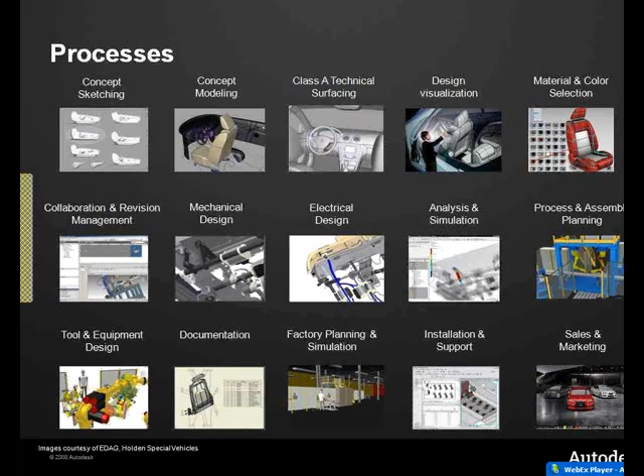So today, I want to first cover Autodesk. Many of you are probably familiar with the Alias product line, but Autodesk as a whole is very versed in all the software applications they offer. You probably know Autodesk Maya, 3ds Max, AutoCAD, Alias, Inventor, and probably Showcase as well. But we also have applications with a very wide range in the automotive industry. Here you can see pretty much all the processes and applications specific to automotive. Today we're going to look at concept sketching and modeling. Later on in the webinar series we'll look at Class A surfacing and visualization. But you can also see we have a full range of mechanical design applications, electrical, all the way down to the factory floor, including machine design, tooling, installation, buildings, you name it, we've got it covered.

We're all here to take a look at the Autodesk Alias family of products. Here you can see Alias Automotive, Alias Surface, Alias Design, and a brand new product, Alias Sketch. This new product, Alias Sketch, is a very unique painting application. It includes both paint workflows and vector workflows that use the exact same paradigm, so you can switch between them without changing your mindset. Perfect for hand sketching or technical illustration.

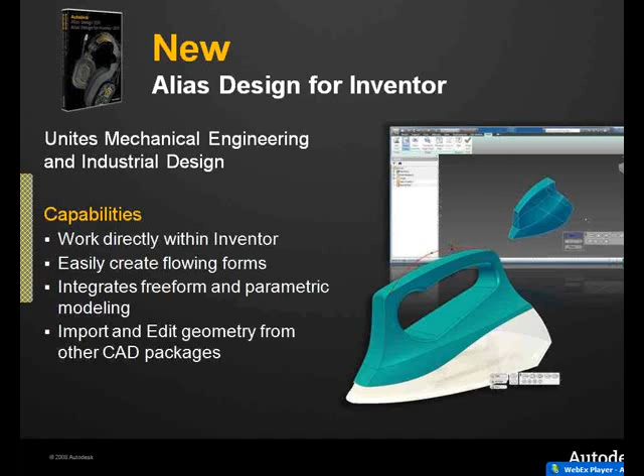Another new product we've introduced this year is Alias Design for Inventor. This is included with Alias Design. It's an add-in for Inventor that adds concept development workflows and really unites the mechanical engineering and industrial design workflows. Very exciting.

For this webinar, we'll be looking at the early process of developing a car, mainly the painting and concept modeling workflow. Next, we'll have the technical surfacing webinar, as well as the visualization webinar. So let's get started.

Here you can see Alias Automotive. Now, I'm using Automotive just because it has all of the features available in the Alias product line. This is what students would use, and almost all of our automotive customers as well. Let's first start out by taking a look at some sketching processes, paint workflows within Alias, and then take that through to some concept modeling and so on.

Go ahead, we're going to take a look at an example, a non-automotive example, just to start off with. Accept all those options. While I have this up, let's go ahead and take a look at what Alias has to offer.

Alias, if you're not familiar with it, is a complete design package. It includes painting, surfacing, Class A modeling, and all mesh tools as well. You can see that this head is actually a polygon head, along with visualization.

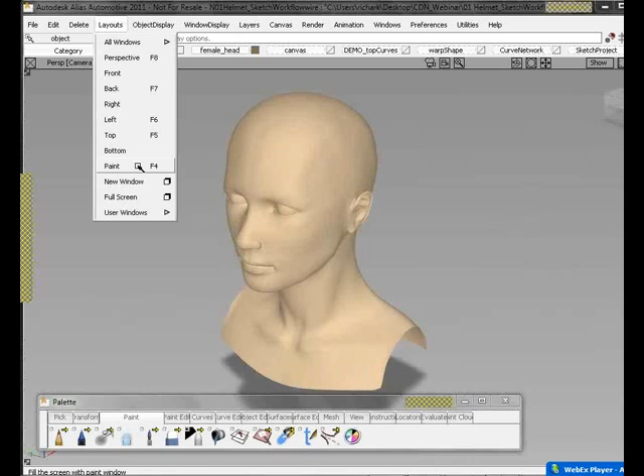Okay, let's take a look at the paint workflow. Inside of Alias, under the layout, there's a paint layout tool, and this brings us into more of a 2D layout window that you would find in other painting packages.

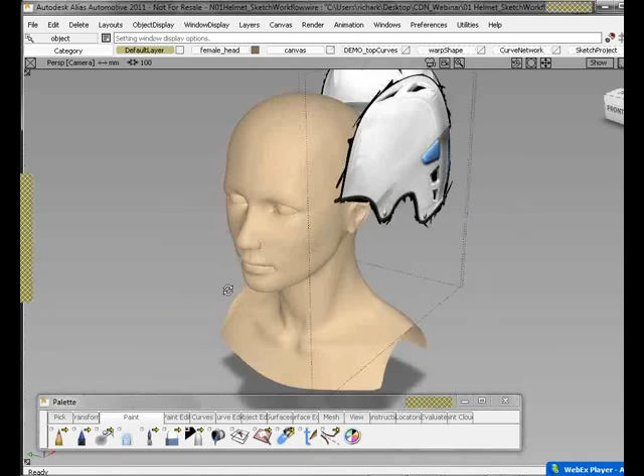Let's take a look at some finished drawings here. I've got this snowboarding helmet in various views. Within one wire file, I have all of my necessary views in order to see this drawing. These views can be set up based on top view, side view, back view, and that way when you're modeling, you have direct access to those for referencing while you're modeling, to get it exactly right, or to be able to hold that design intent all the way to the end.

Let's take a look at how that works. I'm using, just to let you know, a Wacom Cintiq to do the presentation. Any of the tablets will work exactly the same as what I'm showing here.

Here I have a very rough sketch. This rough sketch will allow me to come in here and quickly use tools like airbrushes. Let me just pull up my control panel here, which gives me additional brush tools, including presets. So all the paint tools that you're probably used to, such as airbrushes, paintbrushes, texture brushes - I'll put some diamonds on the screen here. That looks nice, a diamond helmet. So all the paint tools are as you would expect.

What some people don't realize is that we also support a full workflow with curves. With curves, I can come in and select any of my curves on the screen. Here I have some curves just laid out for the top of this helmet. I'm going to open up my layer editor to show you how all of this comes together.

Let's first do some freehand sketching, and then I'll use the curves to do some illustrations for the various effects. To begin with, let's just use a wide paintbrush. Grab that guy, we'll just change this to white. And I have already set up some outlines for masking. These masks allow me to use the curves that I've drawn to make all of my masked out areas.

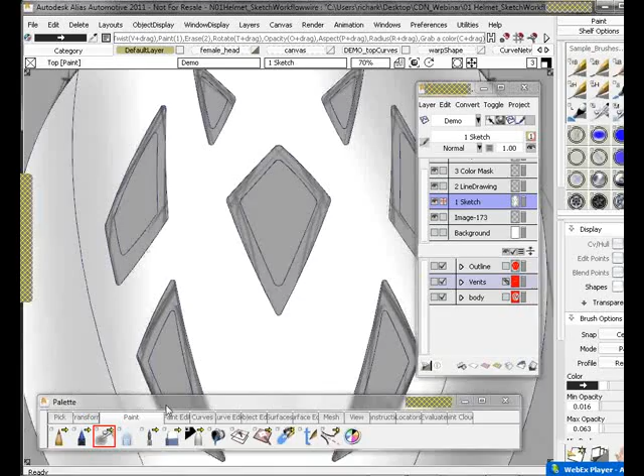Once I have that airbrush, now I can go to the various details. Let's go ahead and just zoom right into these. Switching to a vent is simply linking, adding a link to the various types of masks that I have. For this one, I'll make the highlight here, and then just add in a little shadowing on the one side. Notice none of the paint goes to the other area, so it's very easy to come in here and make these changes and modifications. I'm using a hotkey to adjust the size of my brush.

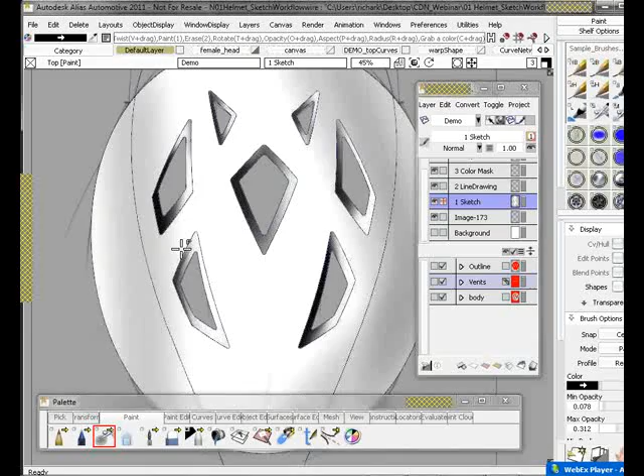We can also use a hotspot. I'm going to move that up here a little bit, so I can interactively change my size and all the different features of the paintbrush tool. Let's just go ahead and paint this in, paint these in really quickly. We'll add in our shadows - we're going to have the light coming in from the left. And that looks really nice.

Next, I can go to the line drawing to outline this. Let's switch over to a pencil, and I'll just grab a black one. Here I'm using paint snap, so if you're familiar with the magnet snap you would use within drawing, I can simply select paint snap and use any of my curves to snap alongside them.

One of the nice features is if this was a part line, I could switch this to edge snapping, set it to a highlight, and then snap only along one edge. That way I can get my part line highlight and shadowing with the exact same curve. That's a really nice feature when making cut lines, especially like cars and all the shut lines.

To finish this drawing off, let's outline the entire area. This outline will help pop it off the background. So let's use a paintbrush, and I'll go ahead and use black, and scribble something on the outline to pop it off the page. There we go, fill in all the holes. Again, paint masking allows me to do this very quickly. I'll snap this along the edge there to fill in these last gaps.

Now let's take a look at some of the shape features. Shapes allow me to use the curves to define a color mask or a ramp. I'm just going to select the inside mask here. I'll hit accept — here you can see it's blue. I have my outlines turned off. I can set those to any color or size, or I can simply turn the visibility off.

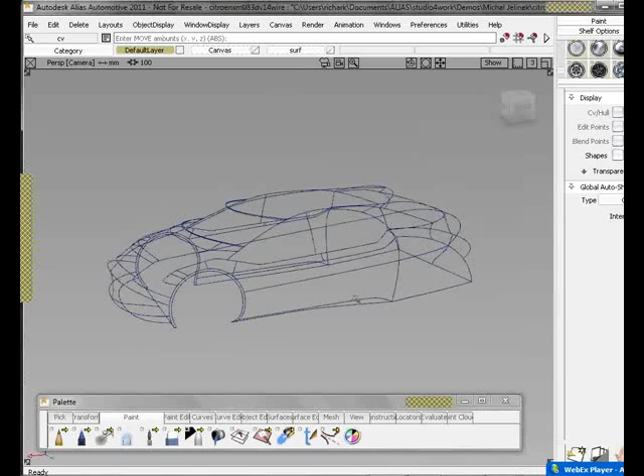Let's take a look at a unique workflow that brings all of these features together into a 3D model. This file was set up by my colleague, Michal Jelinek. He has a very unique workflow — let's turn off all of our surfaces here. He'll create a drawing, such as here, of this car. You can see he's used stamps or texture brushes directly from the library and drew out a side view of his car. He's outlined the car here with curves, and these are the exact same curves you would use in 3D modeling as with the paint tool.

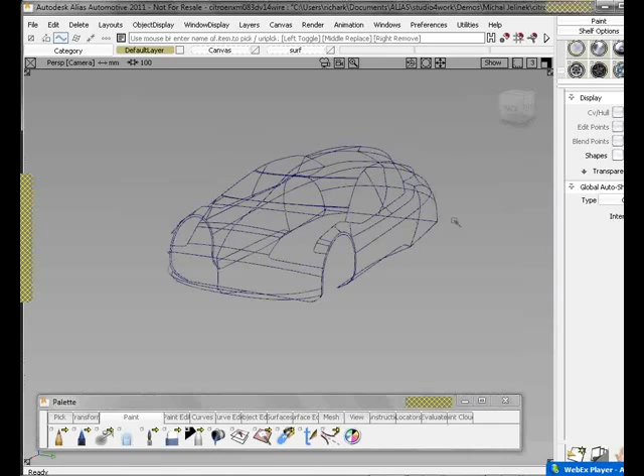If he's let all the paint run past the boundary, that's important, because when you want to start using this in 3D, we want to make sure we have no edges along this model. This is all curves, very easy to do. Many designers get hung up on having to surface a car. Surfacing a car is difficult — it takes time, and it takes a lot to understand all of the different surfacing tools.

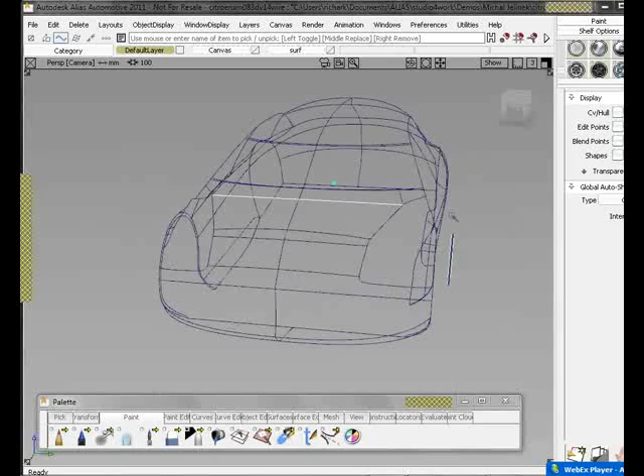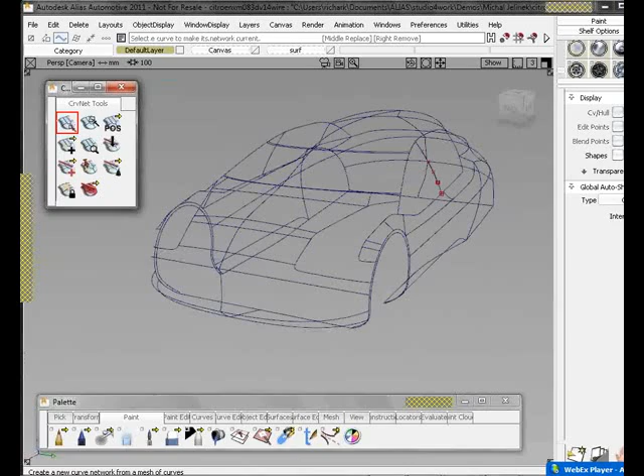But here, what he's done is take his curves — just simple curves, I think some of them are blend curves — that are snapped to create closed boundary regions. Once you have these curves set up, under surface there's something called curve networks. Curve networks allow you to come in, choose to create a new curve network, and pick all of the curves in this model.

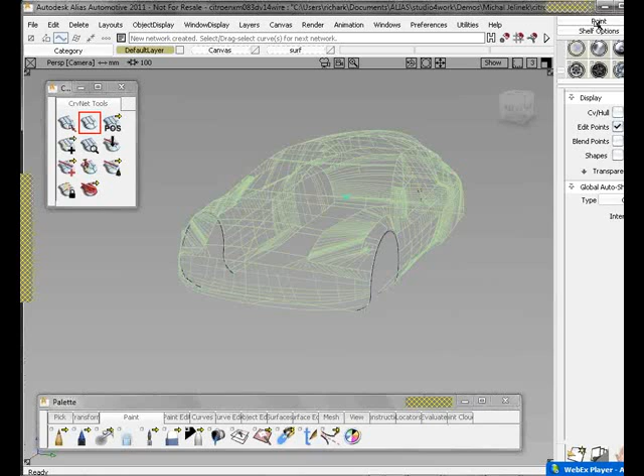Create all of the curves in this model and create a network. Let's switch this over to modeling, and just to keep this simplified, I'm going to turn off the isoparms here.

Once I have this model, yikes. Sorry about that, guys. Let's go set my old projection.

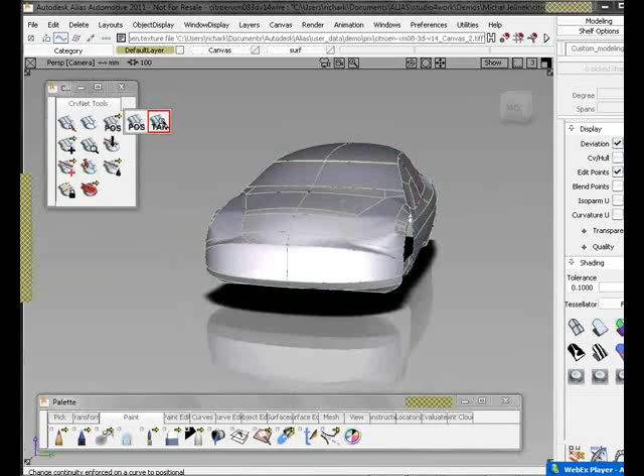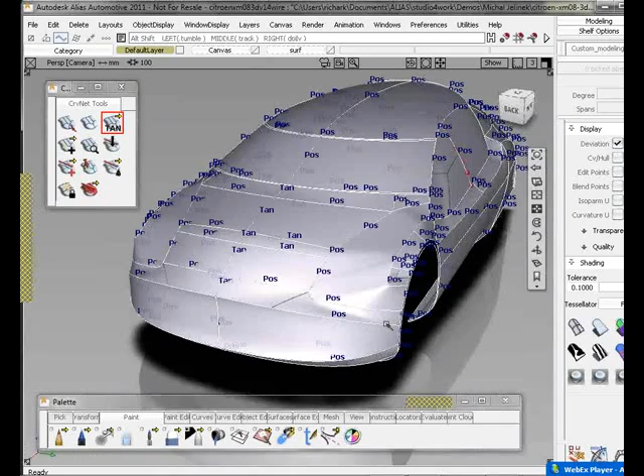Once I have this set up, now it's automatically surfaced anything that was a closed boundary. These areas that need to be a little bit smoother, I can just switch to tangency. Now this looks like a mess of text here, but once you have all of this up, I can just bounding box over the word, and then it's going to resurface that, or make those transitions to be tangent. Once it rebuilds that, now those will be tangent continuity between those. So you can quickly go in there and modify them simply by selecting or clicking on the text.

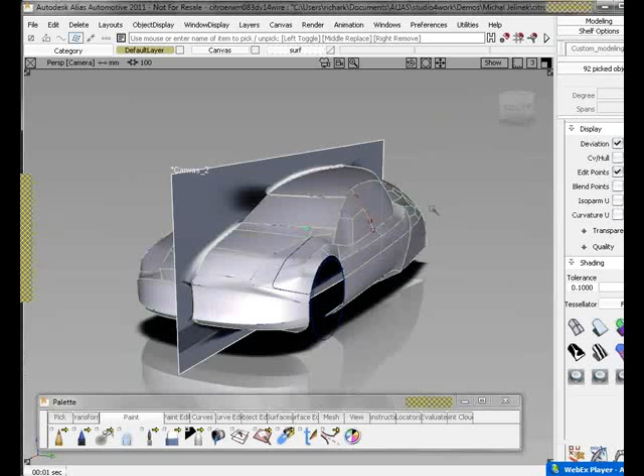With this model, I can come in, and I'm going to bring up the canvas that I have here. I can integrate the canvas and the surface model all into one feature. So what I'll do here is I'm going to select the canvas, select my surfaces, bring up the... I think I might have deleted my wheels here, which probably wasn't the best thing to do. Might want to just reopen that, but we'll go ahead and select our canvas.

Under canvas, I have a project sketch option. Here I'm just going to say all the active objects with all the canvases. So I only have one on here.

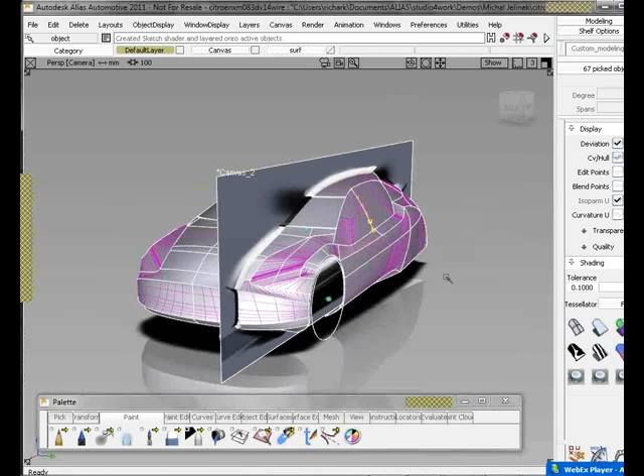Oh. Well, that's interesting.

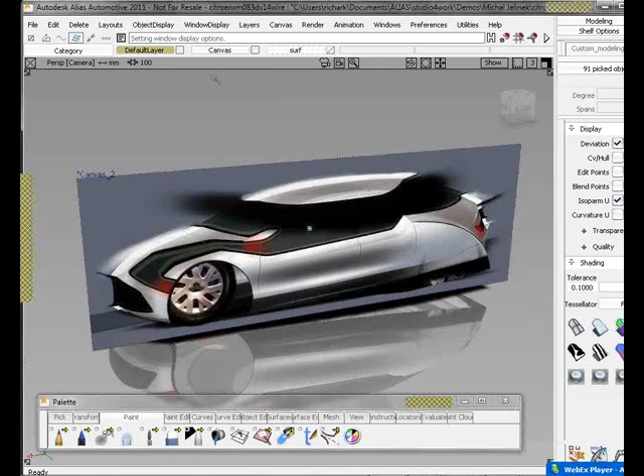There we go, much better. Now, what I have here is I've taken this sketch and I've projected it onto my model. This model is just a real quick and dirty model, very fast, not really worried about much of the detail.

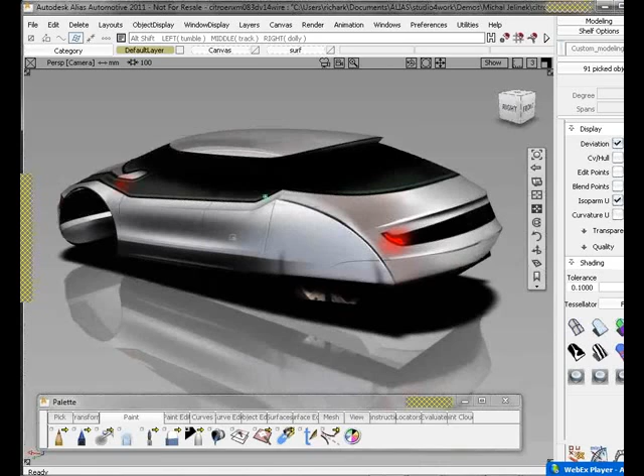I'm going to use my sketch in order to draw all of those details out. Once I have this drawing or view completed, now I can tumble the drawing, be able to position it into a different view. And I could come in here and say new overlay canvas.

And now literally, I can come on and draw directly on top of this model to finish off the details. Just make that a slightly smaller brush. So let's say we wanted to have some vents back here. I can draw in this view to finish off this model.

And really be able to capture the proportion of any angle that I would like to be able to show this in all views and in any of the details. Any detail variations I can do or want to do, I can just simply draw some new ones. Let's change the shape of the tail ends back here. Maybe we'll have a little piece up there.

And then if I want to have a different variation of the tail lamp, I can just tumble it to a new view, tap on the screen, choose overlay, and now I have yet another view that I can draw here. So this makes it, again, very easy to go through many different iterations and views all at once with the same model.

And really capture, be able to turn this car all the way around. This is perfect for professionals or for students that are just learning to really be able to rotate their model into all the views and really figure or solve their model in 3D as opposed to just in a side view or in a 2D drawing.

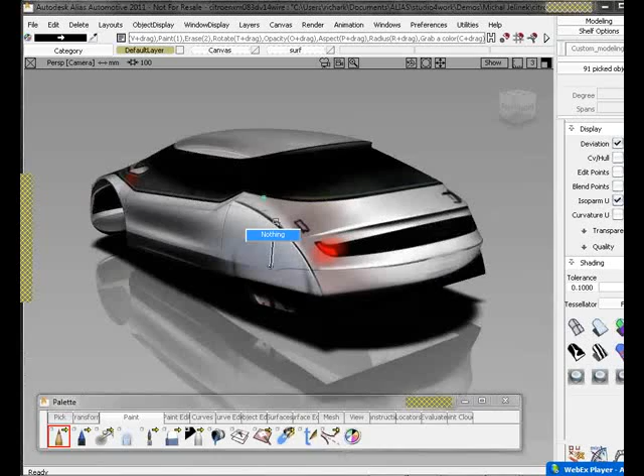Next, let's take a look at a workflow that involves mesh data. So mesh data, or polygons, is very common when using scan data.

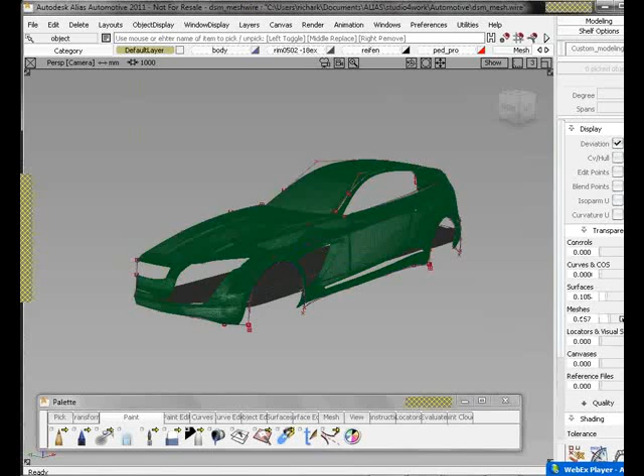When the clay model is finished, or when I should say a surface model is finished, go ahead and I want to turn that down, transparency. I'm just going to turn down my mesh transparency, and that way I can see right through that. And I'm going to go ahead and turn off our ground plane and our shade setting. There we go, now we have just the shading of the model here.

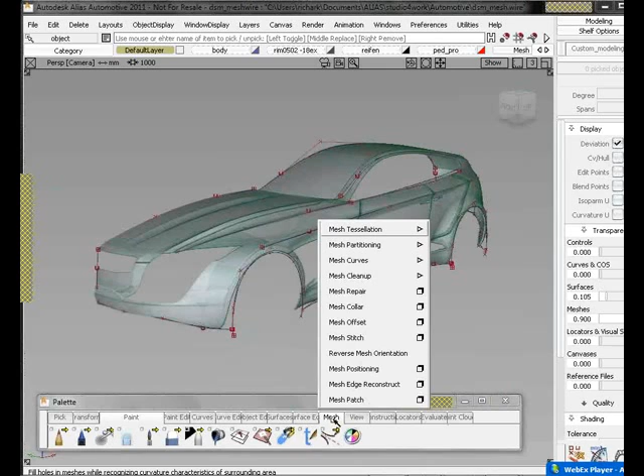So mesh data is produced from scan data. Here, in this example, I've actually taken surface data of this car and converted it to polygons. So under the mesh tool, I have mesh tessellation, NURBS to mesh.

Once that's completed, then I can go in and build simple curves that highlight the different areas. And again, I'm just snapping directly to the mesh data here. I've real quickly laid out curves that define all of the main character lines of this vehicle.

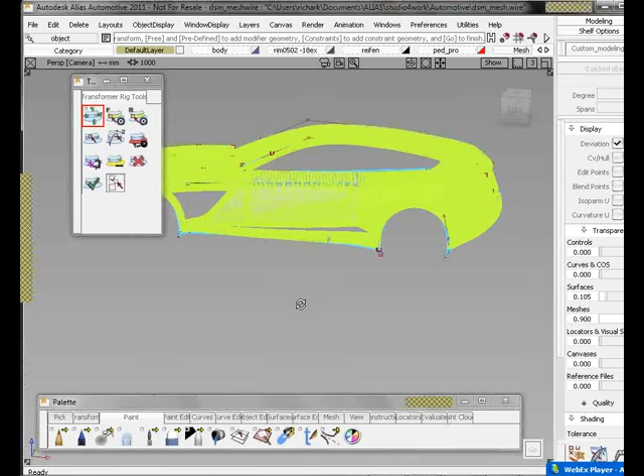I already have set up what we call a transformer rig. Let's just go through that process. I think we're going to have some time there.

Under Object Edit is Dynamic Shape Modeling. Dynamic Shape Modeling is perfect for the concept design phase because it allows you to make very large changes to the model very quickly without having to be a surfacing expert. I've selected all of the mesh pieces in this file.

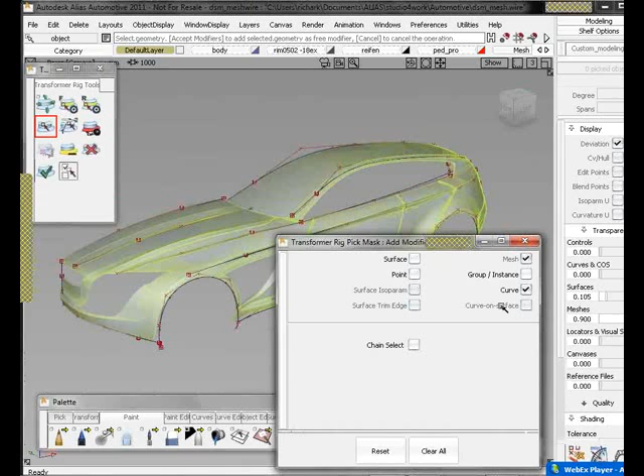I'm going to select what we call a free modifier. These modifiers will allow me to simply come in. I'm going to turn off everything, selection, everything but curves. And I'll just take all my curves, make sure they're all selected there. Hit Accept Modifier, and then this will take just a few seconds to attach.

Once these curves are attached, I'm going to be able to freely move the curves anywhere that I would like and have the model update.

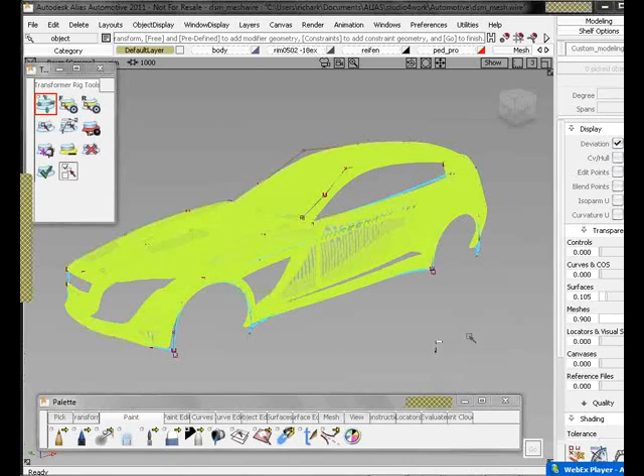Now, we're going to do some really challenging changes to this car. We're going to basically shorten the wheelbase, and the entire car will change proportions. Once I have the rig set up, I can exit all of these tools and just go into the model. Let's actually turn off our control panel as well. Now, I can move individual curves if I would like.

For example, if I wanted to change the roof line, I'll just grab these curves and let's say I'll move them up just a little bit. It's going to go through and recalculate the mesh so that it has those changes along those character lines.

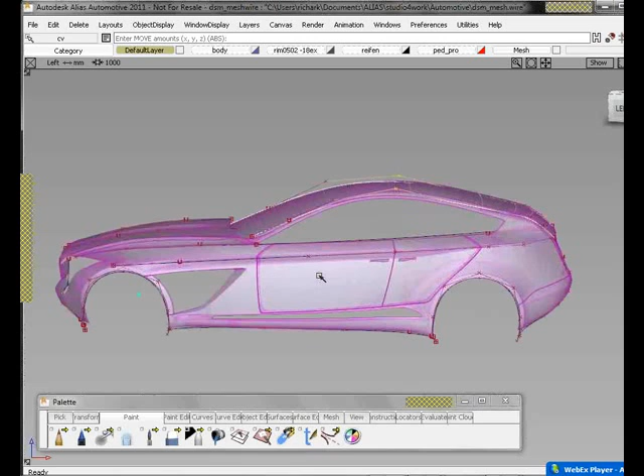We'll just switch back here, turn off the model real quick, and you can see that it's done a very good job of holding everything together and being able to change the roof line. Now that took a few seconds after I let go of the curves to change.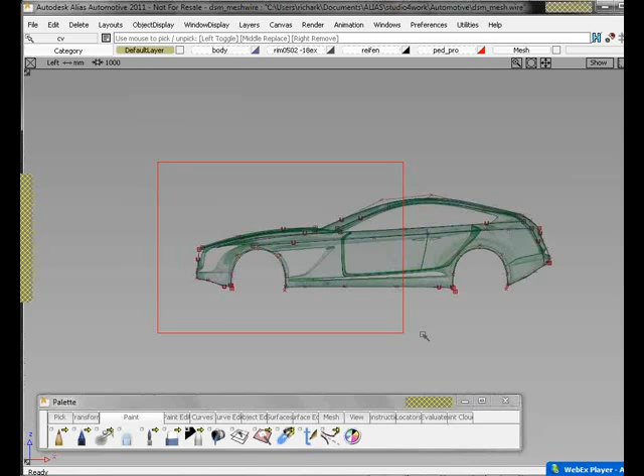If I simply come here to this H, the H represents the construction history. So I'm going to temporarily say Suspend Rebuild. Now I'm going to go into my side view, and now I can simply come in here and choose all of my curves that I would like to modify, and move them.

So we're going to pull this way back. There'll be kind of a two-seater sports car, maybe, I don't know. We'll just make a big, broad change to this just to show the concept.

Here I'm going to just move the curves to exactly where I want. I could go in here and just change all the little pieces, all the character lines. Now this is a major change, so this is going to take just a few seconds to complete.

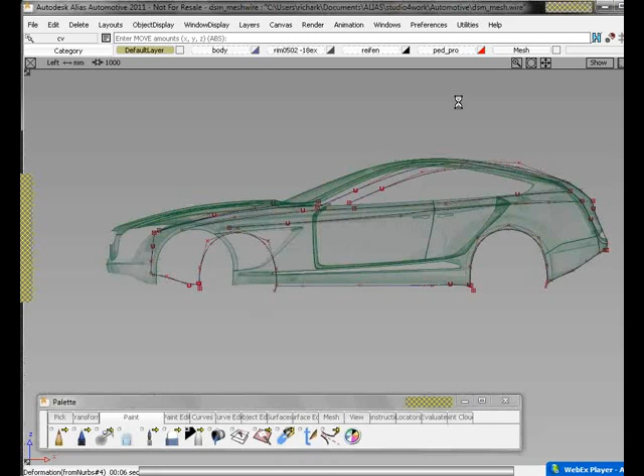Once I have this calculated, you're going to see that all the surface quality and the transitions have maintained and held together. I could instantly take this and make a presentation out of this to show a drastic variation.

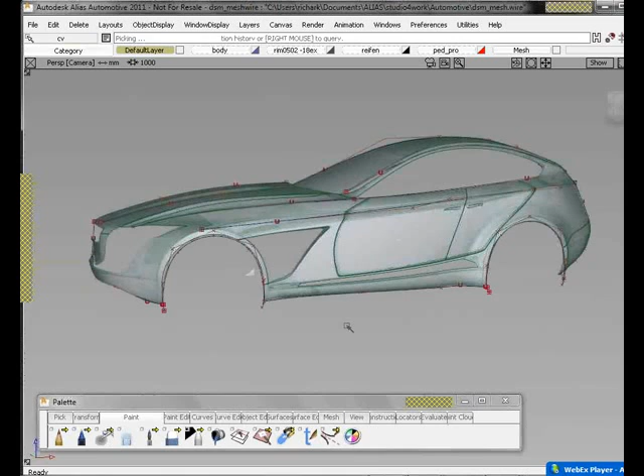Look, I must have missed a piece selecting there when I selected my meshes, but that's okay. You can see that I've drastically changed this car from a very long car to a much smaller wheelbase. If I simply come into the original settings, I can say Show Original Geometry or the modified version. So you can see major, major changes, and all done within mesh data.

Now this would work with curves or surfaces, but with mesh, this allows you to have a scan directly from a clay model, make massive changes to that, and be able to mill that out directly or right back onto the model to see those changes without having to spend the time to resurface the model. So that's very good for reducing the time to make these changes.

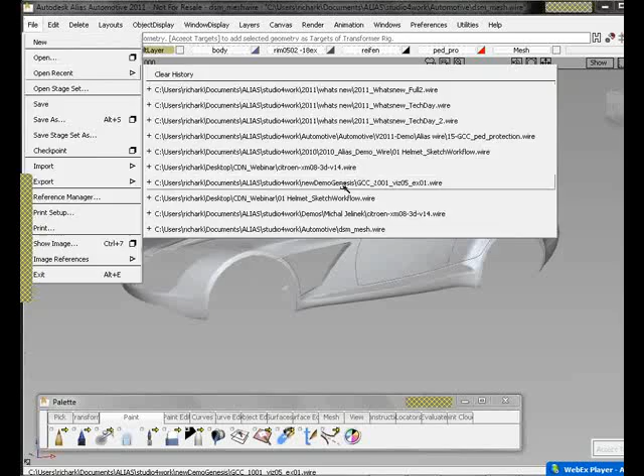Let's touch upon the visualization features. I'm going to start out with the file that I originally had open when I started Alias. Here you can see a fairly complete model of this vehicle.

The shade settings, the hardware shade settings are very powerful. Within 2011, we've added some new features and made the features easier to use for anti-aliasing and ambient occlusion. While this is calculating, I'll just explain ambient occlusion a little bit. Probably some of you aren't familiar with it.

Ambient occlusion is the shadowing that happens when two objects get near each other. It's typically in the corners of, say, a room or in a part or in a vehicle, all of the cut lines, or just as the two surfaces, like in the wheels or the rims come together, there's going to be natural shadowing that happens between them.

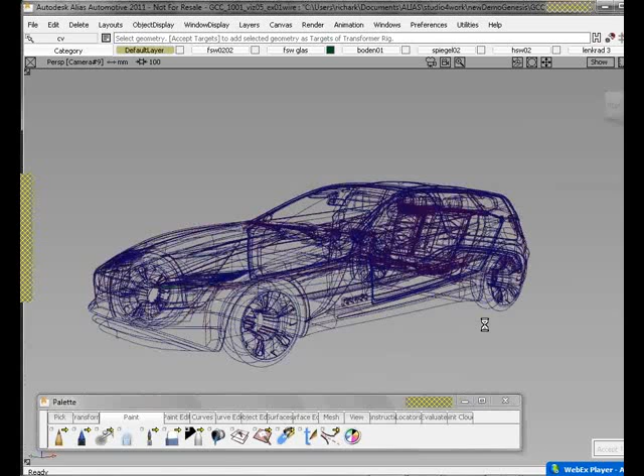We can now calculate those and be able to bake those into the model so that they'll be visible when viewing in the hardware shade setting. This has got a lot of geometry, so it's going to take just a second to display everything. Once I have this shaded for the first time, the second time will be much faster.

There we go, so here is just your normal shading. Let's turn off our wireframe to take a look at the entire car. Right now the highlighting or shading looks fairly dull.

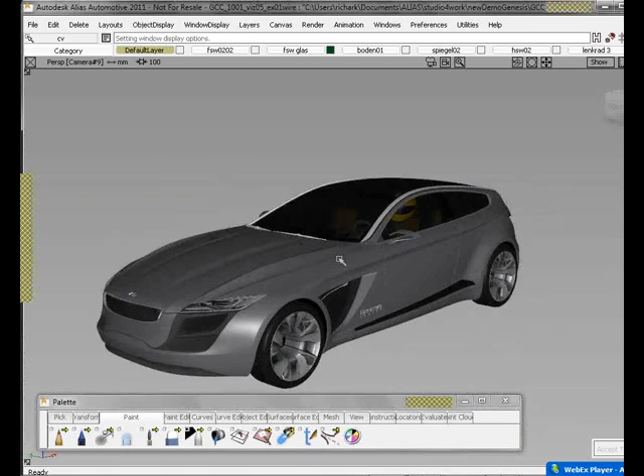What I want to do is add HDR or image-based lighting to the model. If I switch this over to the visualization panel, you can see in the environment section of the library that we have a very extensive library now of a crazy amount of materials. There's all sorts of metallic paint, plastic, you name it, the material is here. At the top of this list is environment. These are preset environments that allow you to introduce image-based lighting or HDR lighting to the model.

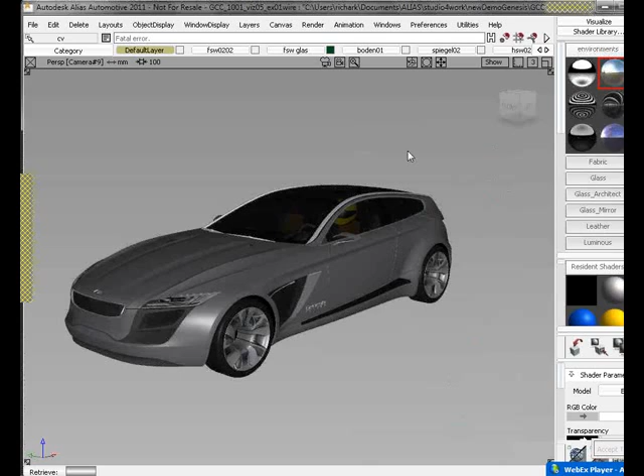Oh, awesome, out of memory. Wah, wah, wah, I should have known—I'm on a 32-bit machine here. On a 64-bit machine, you're able to use as much memory as you have available. Looks like I have multiple applications running, and I ran out of memory. That's too bad, HDR lighting requires quite a bit of memory for both the video card and the system. Let's just exit out of that and move on.

So next in our presentation is Alias Sketch. Alias Sketch is a brand new sketching application that combines both paint workflows and vector workflows. Let's take a look at this.